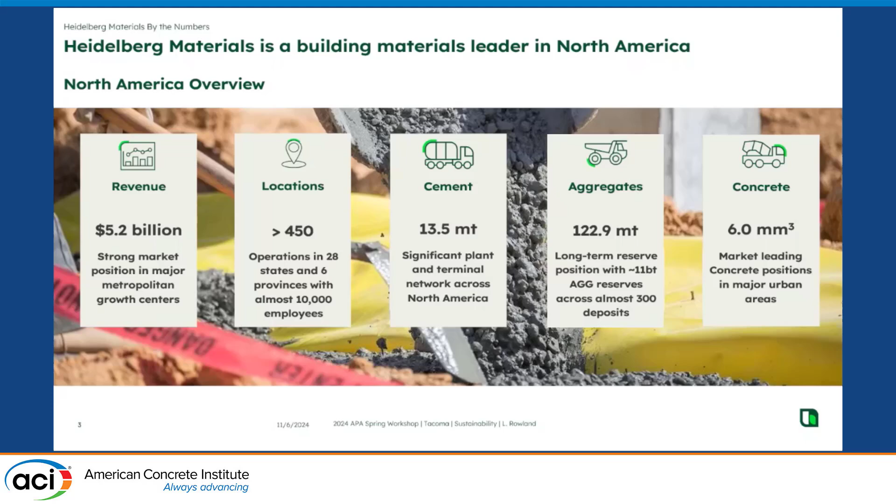Heidelberg Materials is a big company here in North America. You can see we have quite a few people that work for us. We produce more than 10 million tons a year of cement, which means we have carbon emissions of more than 10 million tons every year. And of course, we do some concrete, we have quite a bit of aggregate, and we are highly engaged. We're an international company, so we bring that international perspective to the table as well.

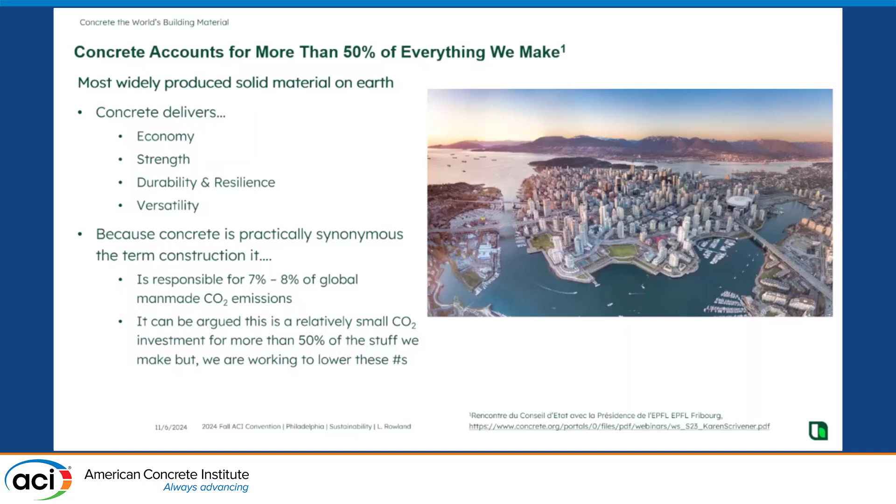Concrete, make no doubt about it, is a very sustainable product. It's more than 50% of everything we make on Earth, besides water. You've heard this much repeated factoid, besides water, concrete's the number one thing. But I learned from Karen Scrivener, a great proponent of limestone calcined clay cements, that it's more than 50% of the volume of everything we make on Earth. Because it's such a big piece of everything we make, we have a significant carbon footprint. It's only 7 to 8%, which is a pretty good payoff for 50% of everything we make. However, it's a significant number, and so we want to reduce that everywhere we can.

People are very excited about timber and some of those materials, but honestly, there's no way to replace concrete in the built environment. If you wanted to convert just 25% of the market for concrete to heavy timber or any other burnable material, you would have to plant a forest the size of India, and wait 30 years. And you could harvest that forest, and oh, by the way, I hope you plant another forest to follow it up. So concrete's here to stay.

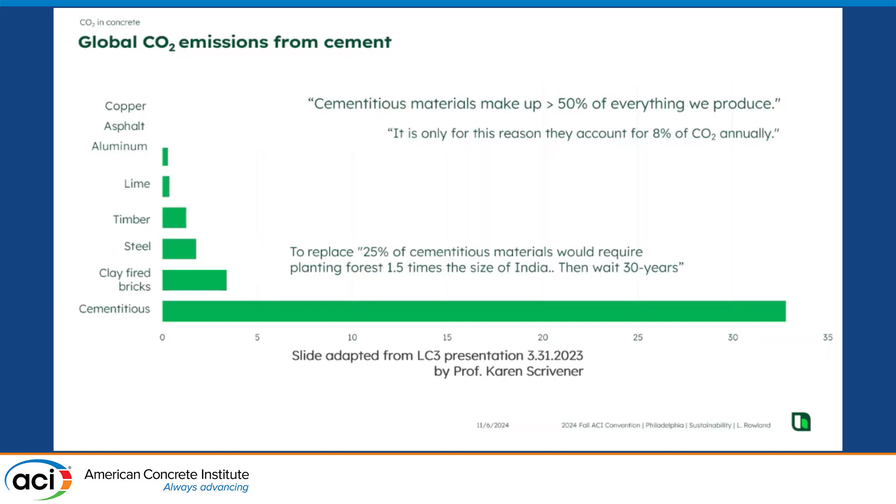The point is that we need to work hard to make it more efficient. It's very low energy, very low carbon associated with it. By weight, it's one of the very lowest carbon materials you can use, because frankly, concrete is based mostly on aggregate. And aggregate, you pick it up off the ground and it's ready to go. You harvest it from a quarry, you screen it, you process it. There's nothing else to do with it. It's ready. So concrete is a very sustainable product.

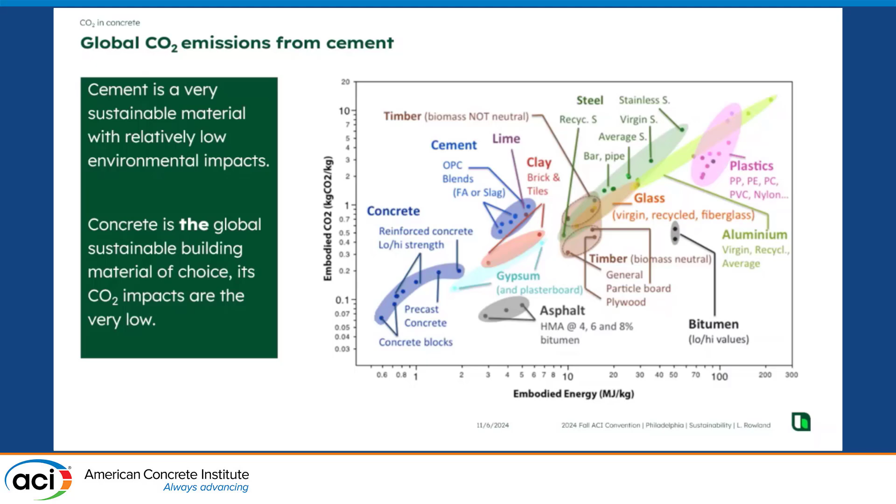But the way that we look at it and evaluate any material is typically through a life cycle assessment. Almost everyone here understands this, but I want to go through it because it's always good to lay the baselines. When we evaluate a material, we're looking at the production stage, A1 through A3. So the idea is we're talking about all the work to get the material ready, move it around for logistics, that's our A2, and then A3, manufacture the product.

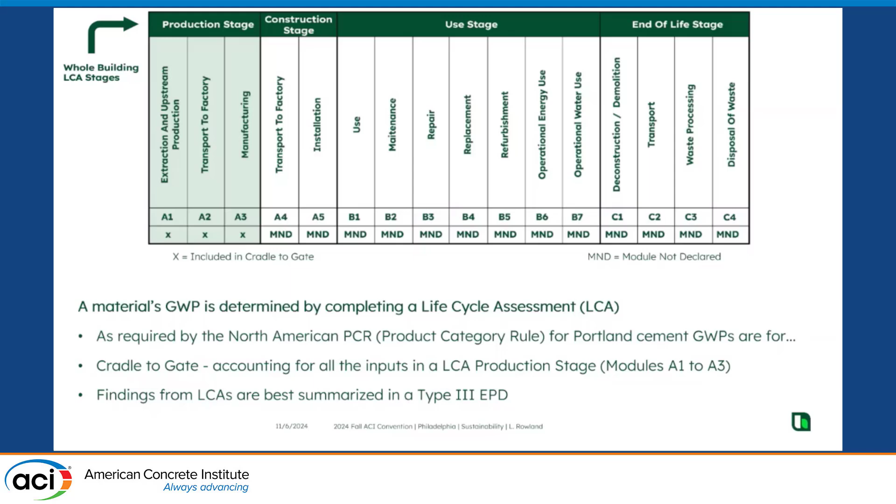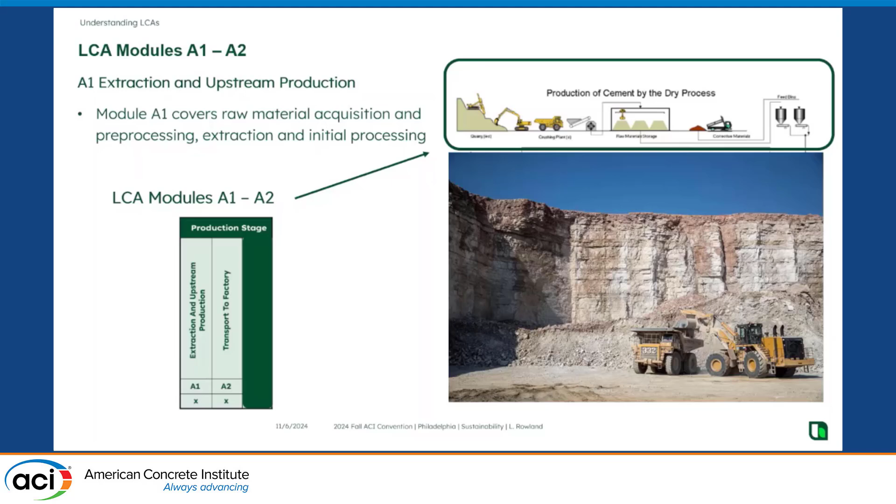For cement, the key A1 and A2 started in the quarry. We're looking for calcium and silica-bearing materials for the most part, and we're going to harvest that from a quarry. So our A1 and A2 begin here in the quarry, and then our A3 is the manufacturing process.

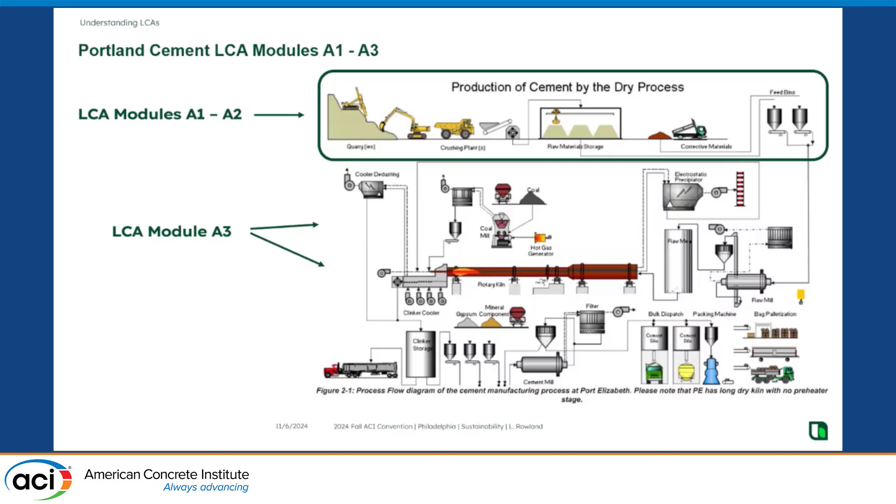The big impacts for cement come from the manufacturing. The A1 and A2 are very low in carbon. If you look at an environmental product declaration, it will list the A1, A2, A3. The A1 and A2 for cement is very low, the manufacturing process is very high. The reason that's so high, you can see here, here's our quarry to manufacturing to shipping at the end. These are the impacts associated with these different pieces of it.

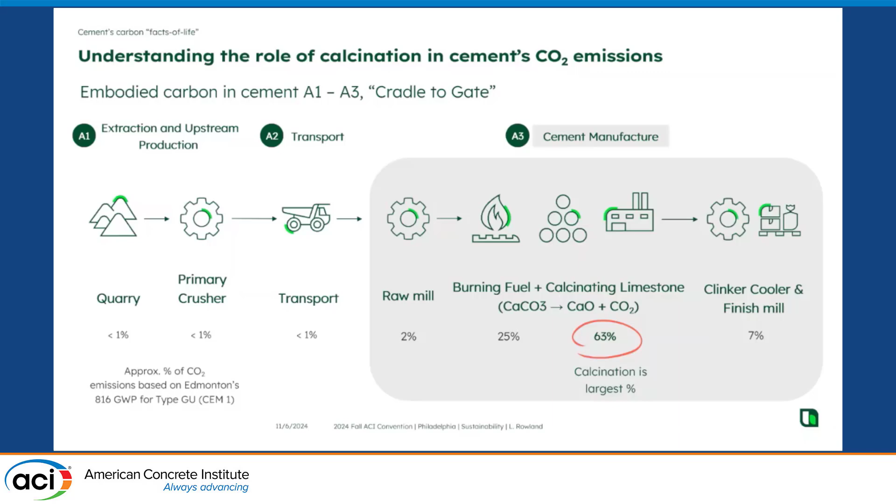There's right there our calcination process. When we're heating limestone, we're driving off the CO2 associated with the calcium carbonate. We're recombining that calcium with silicates to make primarily calcium silicate compounds. Of course, there's aluminum and iron in there as well, but primarily calcium silicates. And in that process, we're calcining our limestone. Once we get up to about 1400 degrees F, we drive off the CO2, we capture the calcium, the CO2 goes out of our stack.

That's more than two-thirds of all the emissions associated with cement production, come from that calcination. And the neat thing about it, a fact of life we sometimes talk about, is that CO2 can be reabsorbed. So when you're manufacturing products like concrete block and pervious materials, they can absorb almost all of that CO2 back because it's released into the atmosphere.

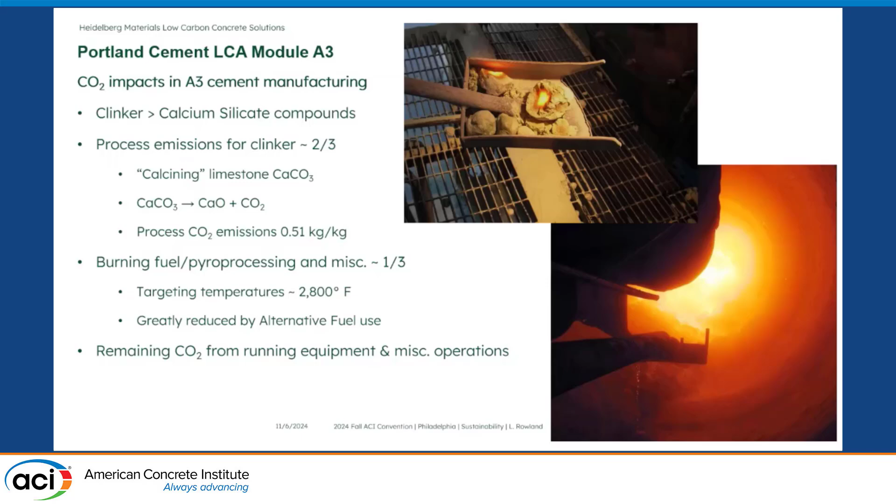If you have materials that are hungry to reabsorb CO2, that CO2 can be reabsorbed. I think I misspoke there earlier and got my terms a little mixed up. But the point is, this is where the big impacts are from calcination, and of course burning fuels to get to those temperatures is the other really big piece.

So when we're talking about concrete, we focus on cement because that's where the big impacts are. The way we manufacture cement and have it be a lower carbon material is, number one, we get better and more efficient at burning. That's the number one thing we can do. All of our processes, we want to get very efficient at and reduce the CO2 associated with the manufacture of our clinker.

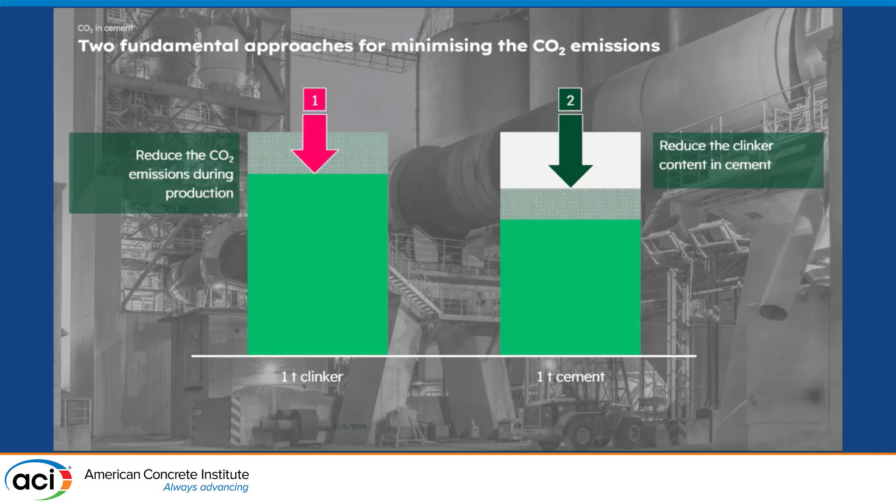The second thing we do is we reduce the clinker in our cement. We're doing that through blended cements like Portland limestone cements, and we can do that through other blended materials. Essentially what we're doing is cutting the clinker back, reducing the amount of clinker in our cements, because that's where our big impacts are.

Here's a good example. This is just a quickie bar chart that shows you. Traditional Portland cement, you can see, is almost 95% clinker. Portland limestone cements, we've reduced that by about 10%. This happens to be one of our top performers for PLCs, and as you know, we all like to talk about our top performers. That's why EPDs tend to be our very best concretes, our very best cements.

And then blended cements. You can get this cement right here in Philadelphia. We have a product right up the road near Reading, Pennsylvania, where they make a type 1S, and because it has 40% ground blast furnace slag, our clinker content is way down to about 56%. One of the lowest GWP cements available in North America, 531. So if you're trying to reduce your carbon footprint with your concrete, you can just use that cement by itself.

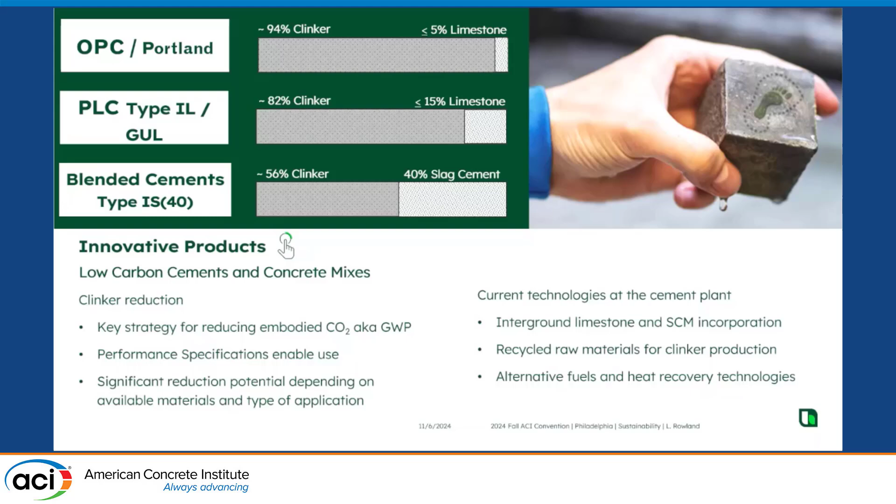You can buy a PLC and do the blending at home. You can have silos, you can have slag cement, ash, whatever those different materials are. So we're trying to reduce our clinker content. That's essentially our big push.

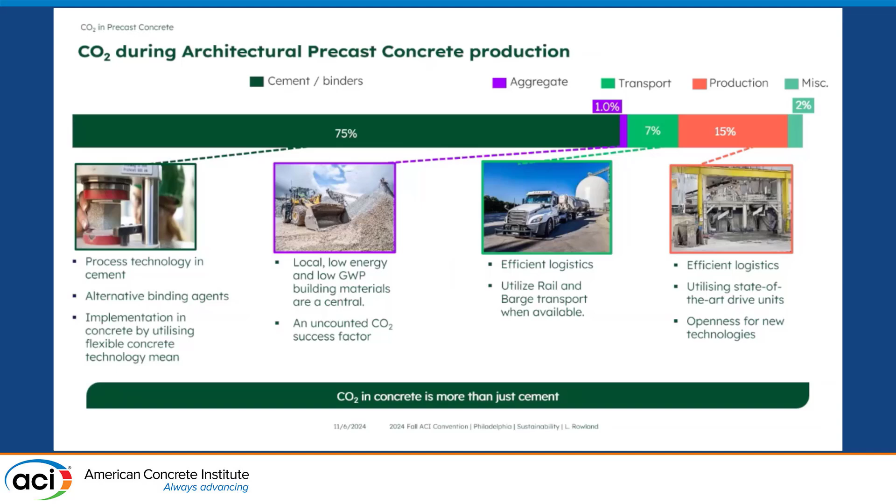And I'm talking so much about cement because, as demonstrated in this bar chart, it is where most of the impact is. Most of the CO2 associated with your concrete will come from the cement. And I know that's an old thing and everybody already knows that, but it's important to talk about.

So people like us, Heidelberg Materials, we're changing the way we do business, and we are seeking very hard to make sure that our cements are very carbon efficient. We're trying to reduce the overall carbon associated with the cementitious materials we sell.

These are the world's most aggressive goals for 2030 to reduce carbon. We're going to reduce our cement, the CO2 associated with our cements. That's going to result in about a 47% reduction overall, and we're looking to capture 10 million tons of CO2 through carbon capture and storage.

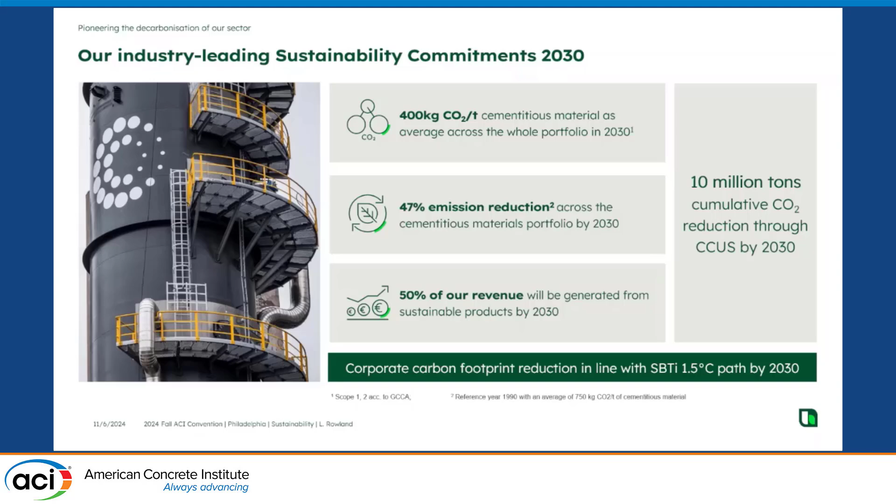So these are the big things that we, and other people in the industry—we're not the only ones—the industry is responding in these ways.

The traditional way, what has been established and that we know works, and that is the most powerful tool we have available to us currently, is to be energy efficient. Reduce the CO2 associated with the clinker that we manufacture, reduce the amount of cement in our concretes, or the clinker content essentially, in our cements by using SCMs, using blended cements, etc.

And then the other thing that we can do is be better designers. Structural engineers in this room, you can use your talent, use your know-how, and be very efficient with the concrete that you build with. And there's nothing—if you don't have to put the concrete in the building, then obviously you're going to save that CO2. You're going to reduce the environmental impacts associated with that structure.

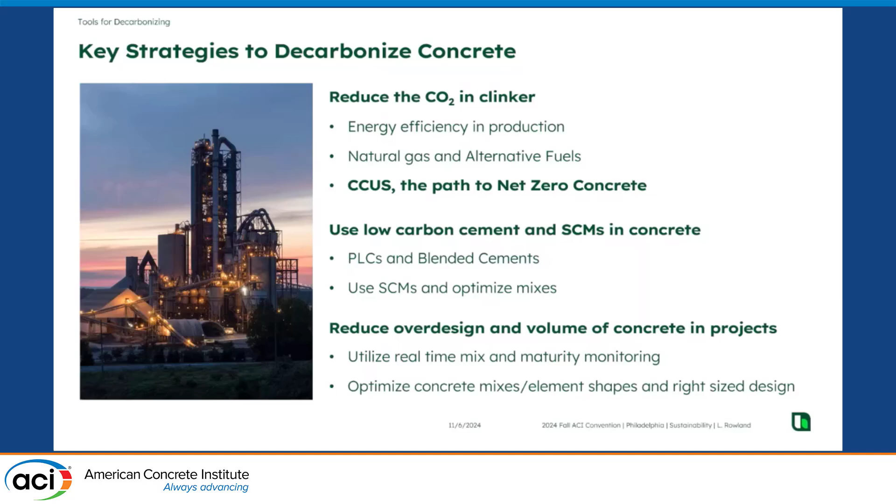So these are the levers we have to pull now. And carbon capture and storage is honestly the only way for us to get that CO2 back that we've released during calcination. Other than natural calcination or recarbonation that happens in block, like we talked about, and in concrete in general, carbon capture and storage is really the big lever that we have to pull.

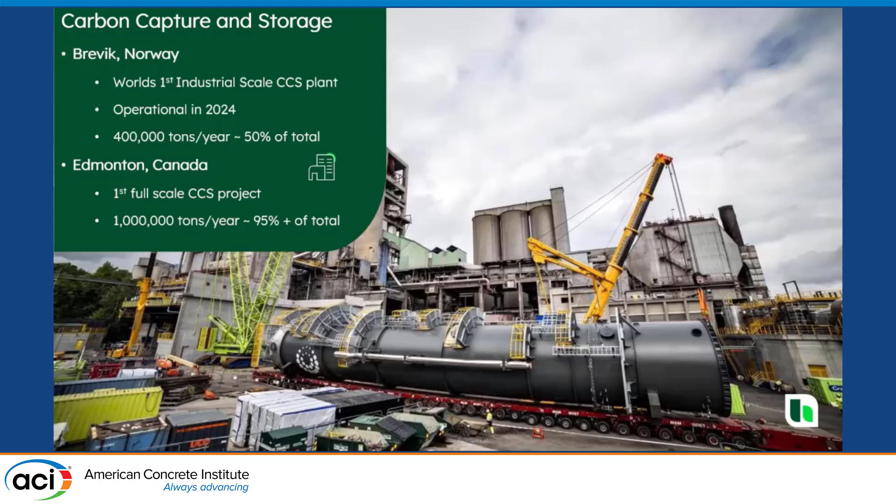It's very expensive, it's very hard to do, and so the very first one that's going to be put into place is in Brevik, Norway. They're going to capture 400,000 tons a year.

We're going to be doing this in Europe now. In Europe, you can actually buy the cement now—you can prepay or go into a purchase agreement, and you can identify that cement for your project.

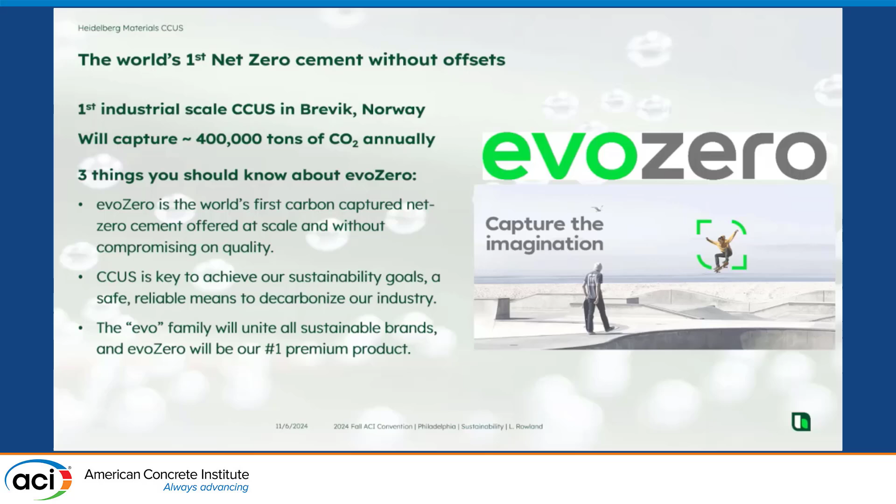So essentially your job will have a net zero carbon footprint associated with that, because as the cement is manufactured and the CO2 goes out the stack, it's captured, cleaned, scrubbed, separated, compressed, and eventually put down into the ground for permanent storage. That's carbon capture and storage, and we're doing that throughout North America and the whole world.

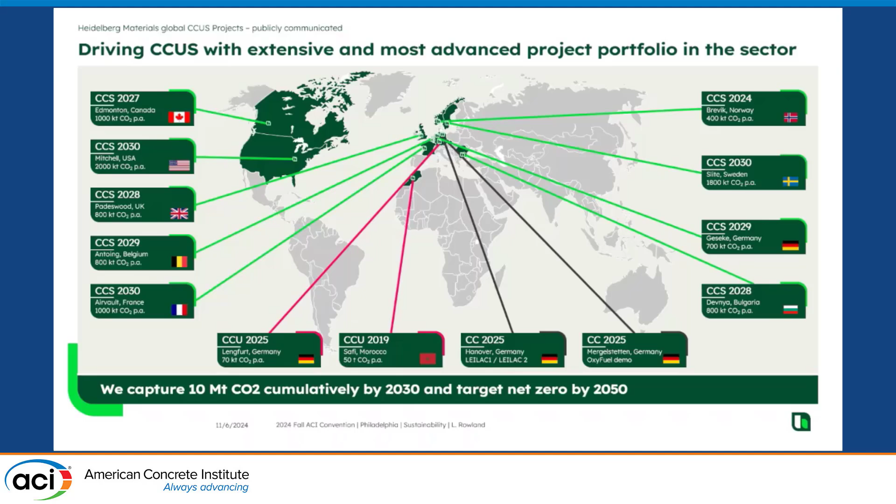The very next one, the first full scale, will be in Edmonton, Canada. Those are our plans, and we're hoping to have that operating in 2027 at 1 million tons a year. After that will be Mitchell, Indiana, at 2 million tons a year. Remember, we're trying to get to 10 million tons cumulatively by 2030, so we've got to install this equipment and start capturing carbon in a very big way.

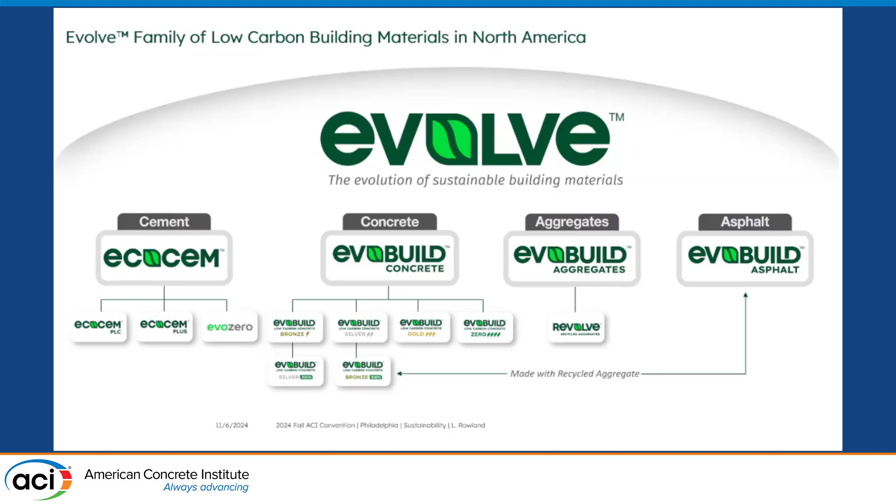And of course, all these materials—like many people, we have low carbon products. There's concrete, aggregates, cement, etc. But cement is, like we talked about, the big way. Slag cement is one of the very well recognized levers to pull.

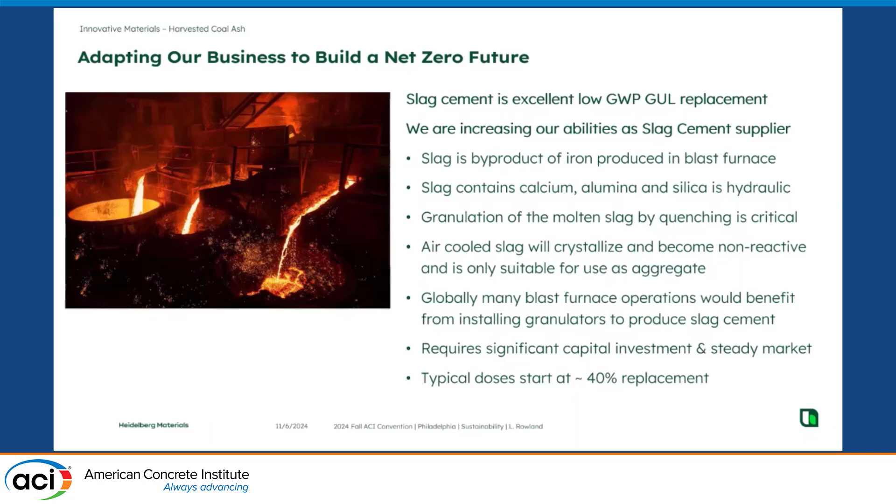This is an SCM you should be familiar with. There's lots of good information about this we can talk about another time. Essentially, this is a waste product just like fly ash—something that would otherwise either go to the landfill or be used as an aggregate or some other less impactful place, and instead it's used to replace cement. We're reducing the clinker content in our concrete.

Fly ash is another SCM everyone is very familiar with. Who's heard that fly ash is going away? Good, it's not. We have 2 billion tons of fly ash that has been landfilled in North America that we are harvesting, beneficiating, and making useful for concrete. You're right—I said no, you're not, but you're right. Fresh ash is going away.

The coal burning power plants that produce fly ash are converting to natural gas and renewable energy, which is a fabulous boon—that's what we want to do. So those fresh ashes created by burning coal are going away. However, we burned so much coal for the past 50 or 60 years, and put so much in landfills, that there's a tremendous resource there.

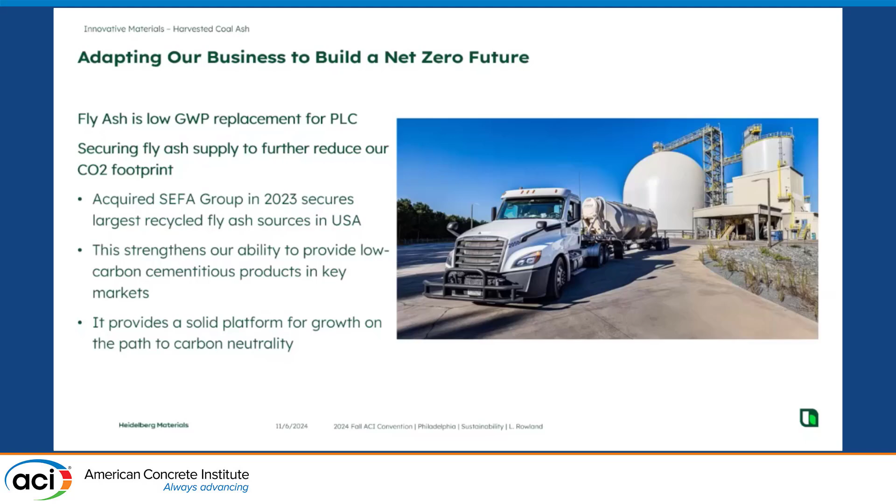So we are going out into those landfills, identifying where it was great fly ash when they put it in there. We're reharvesting that, processing it, and making it ready for use in concrete. So it is going away, but beneficiated ash will go ahead and fill that gap.

Some of the neat things we're looking at coming up are nanoparticles and nanotechnologies, which fall in this category. Among these newly developed materials, we talked about calcined clays a bit. We can utilize ground glass pozzolans and other waste materials that are reactive when reduced in particle size. If you grind something fine enough and it's an amorphous silica material, it will typically be reactive in concrete—that's where some of these other materials come from.

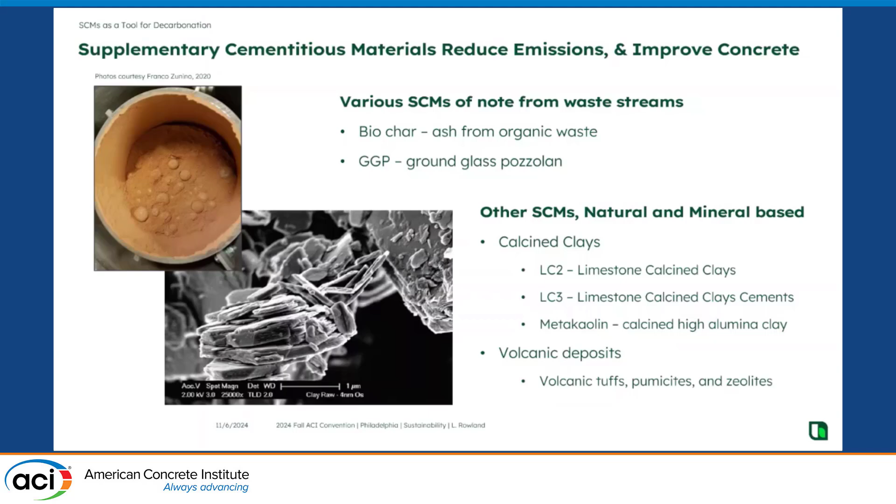We're going to talk a little later about materials like organic materials as well. So this is what's coming, this is what we're finding to do.

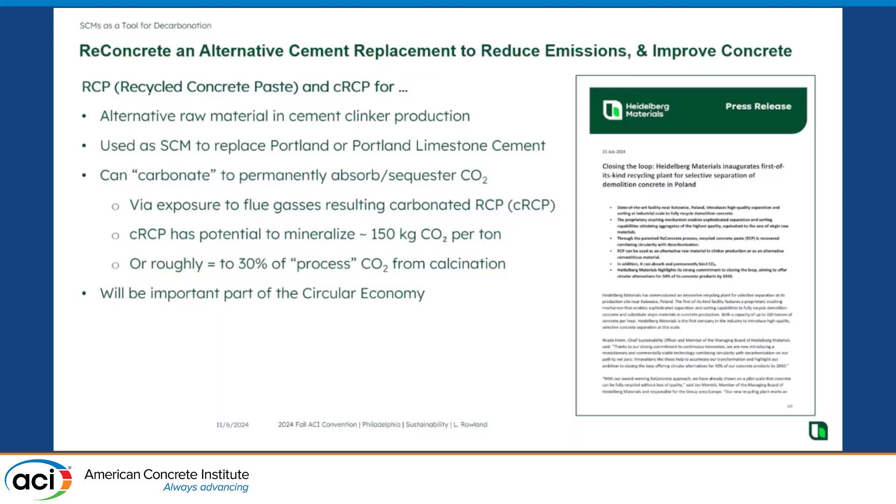We're taking concrete that is crushed—everybody's very familiar with recycling concrete—but the fines have always been a problem. The paste portion, the finest material you get from crushing, has always been a problem. We are converting that problem into a solution. We're able to turn that material into an SCM or reuse it to manufacture cement.

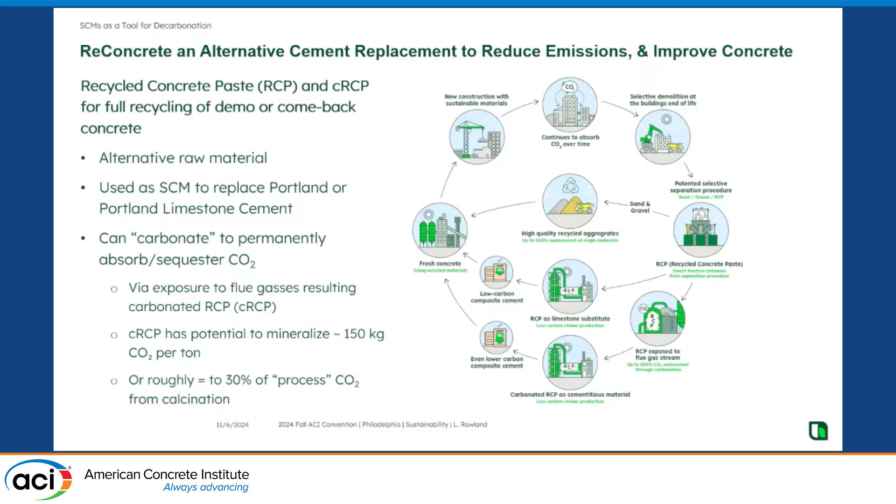And that's a big part of the circular economy, right? You're taking a material, crushing it up, either reintroducing it into the kiln to manufacture more cement, or turning it into an SCM to replace Portland or Portland limestone cements.

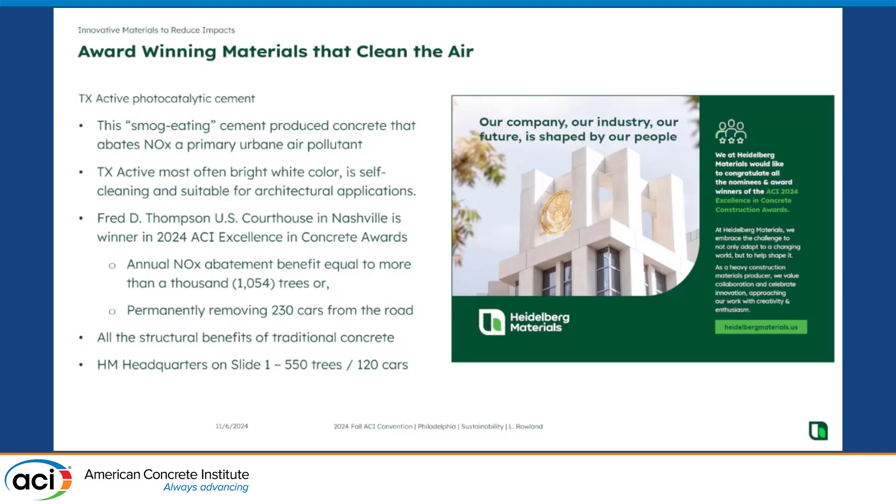And then, of course, there are very cool products like TX Active, a photocatalytic cement. This is an award winner that won at the awards just here on Monday night—the Fred Thompson Courthouse. It's equivalent every year; it'll abate as much smog as 1,000 trees. It's a pretty neat project, essentially a nanotechnology. We're introducing a very specialized titanium dioxide into those mixes to make it photocatalytic.